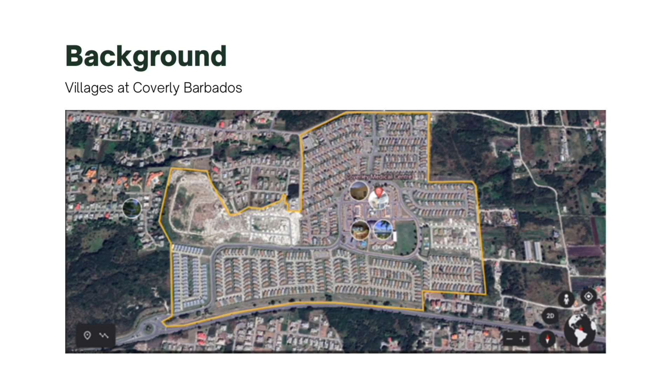The subject area I'll be focusing on is the villages at Coverly, a relatively new housing development located within the southernmost parish of Christ Church, Barbados.

It was designed to be a mixed-use community, offering residential, commercial, and recreational spaces for its residents. The development covers approximately 300 acres of land and is situated near the Grantley Adams International Airport.

Within this study, there are three key objectives: first, to identify the most suitable renewable energy sources for the area based on factors such as local climate, energy demand, cost, and availability.

The second objective is to implement alternative green building materials in the construction of new residential houses. Thirdly, to educate and raise awareness among residents about the benefits of using renewable energy and energy efficient appliances through regular community engagement activities within 1 year.

Subsequently, the three aspects I'll be focusing on to achieve these goals are the implementation of solar panels, rainwater harvesting which will be used in agriculture, and lastly, the use of green building materials.

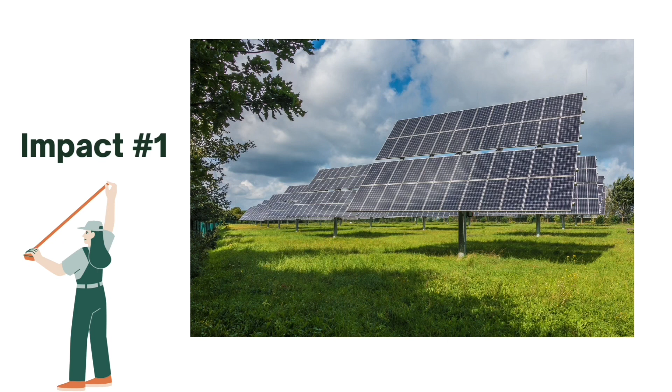Firstly, solar panels, also known as photovoltaic panels, are becoming increasingly popular as a source of renewable energy. They work by converting sunlight into electricity, which can then be used to power homes, businesses, and other electrical devices.

The usefulness of solar panels cannot be overstated, as they offer numerous benefits both for individuals and for society as a whole. First and foremost, solar panels are a clean and renewable source of energy.

Unlike traditional sources of energy such as coal and oil, solar panels do not emit harmful pollutants into the atmosphere. This means they can help to reduce air pollution and combat climate change, which is becoming an increasingly pressing issue in our world today.

By using solar panels, individuals can reduce their carbon footprint, thus helping to create a greener, cleaner, more sustainable future.

In addition to the environmental benefits, solar panels can also be extremely cost effective. While the initial investment in solar panels can be significant, they can also provide substantial savings over time.

By generating their own electricity, individuals can reduce their reliance on traditional power sources and potentially save money on their monthly energy bills. In some cases, solar panels can even generate excess electricity that can be sold back to the grid, providing an additional source of income.

Rainwater harvesting systems can vary in size and complexity, but they generally involve capturing water from rooftops and other catchment surfaces and storing it in tanks or other containers for later use.

The collected rainwater can be used for a variety of purposes, including irrigation, toilet flushing, washing clothes, and even drinking if properly treated. Finally, rainwater harvesting can help to promote sustainable agriculture and food production.

In many developing countries, agriculture is a major source of income and food security, but it is also a significant consumer of water resources. By using rainwater for irrigation, farmers can reduce their dependence on groundwater and surface water sources, which may be overused or even polluted.

This can help to promote more sustainable agricultural practices and reduce the impact of agriculture on water resources.

And this key point particularly ties into this aspect, as it will be used to help water crops in the community, which should be sold at the market.

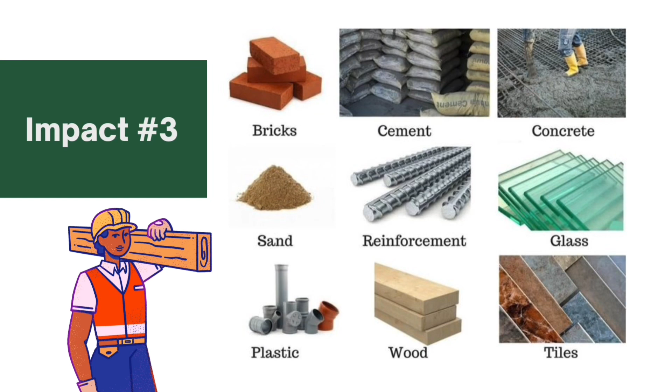Lastly, green building materials refer to materials that are eco-friendly and sustainable, which can be used in the construction, renovation, and maintenance of buildings. These materials are designed to reduce the impact of buildings on the environment, reduce waste, and promote sustainability. The use of green building materials can have significant benefits for developing sustainable communities by improving the environmental, social, and economic aspects of building construction.

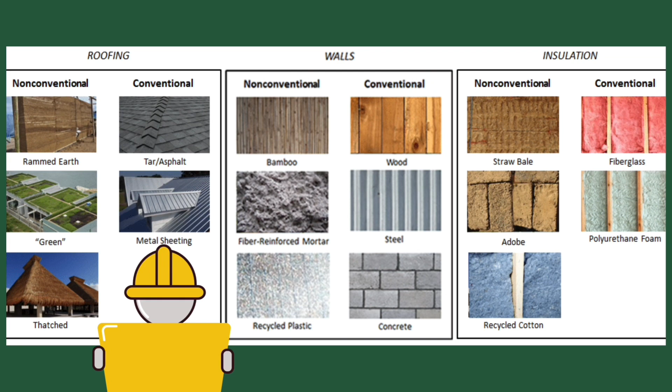Traditional building materials such as concrete, steel, and brick require large amounts of energy and resources to produce and transport. On the other hand, green building materials such as bamboo, recycled plastic, and salvaged wood require fewer resources to produce and transport, reducing the overall carbon footprint of construction. Green building materials are also typically made from renewable or even recycled material, thus reducing the need for new resources.

And minimizing waste. As it relates to the procedure aspect of this project, it was done through two steps: the first being through a questionnaire, and the second being through GIS applications, to gain an understanding into the area of land which falls underneath Coverly's ownership, to see where the buildings and roads fall within the community, and which areas are still under construction or even vacant, to implement the three aspects, which were solar panels, rainwater harvesting, and green buildings.

The questionnaire consisted of 14 questions, which all aimed to gather information on the residents of Coverly's energy habits to gauge the range of their current energy habits. This information will then be taken to advise the community on aspects of their habitual routine which could be adjusted to help save them time and conserve more energy.

Some of these questions include what type of lighting they typically use, if they have any energy efficient appliances, if they turn off their lights and electronics when not in use, and whether they have solar panels installed.

As it relates to the GIS component, this was done with accurate information provided by the Barbados Lands and Surveys Department, which shows a detailed view of the land elevation, where the roads are located, and the exact positioning of the houses and buildings. With this information, I was able to decipher where the proposed aspects should be implemented in the land.

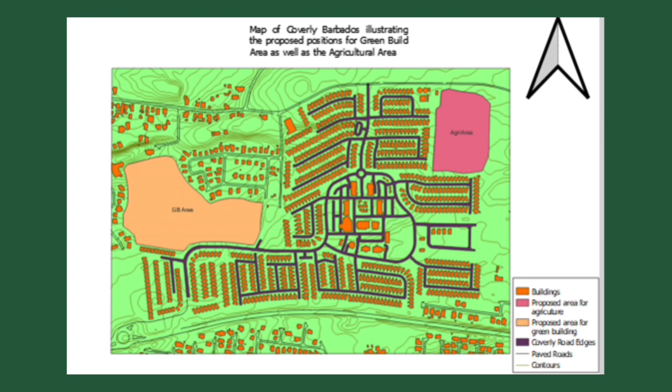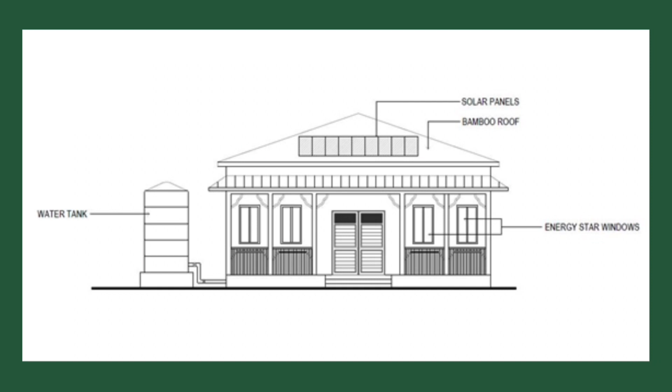In conclusion, it is in fact possible to implement these new aspects into the community to aid in becoming more sustainably viable, thus coinciding with United Nations Sustainable Development Goals for 2030, and with the residents of Coverly being open to learning new ways to reduce their energy use, this could in fact come into fruition.